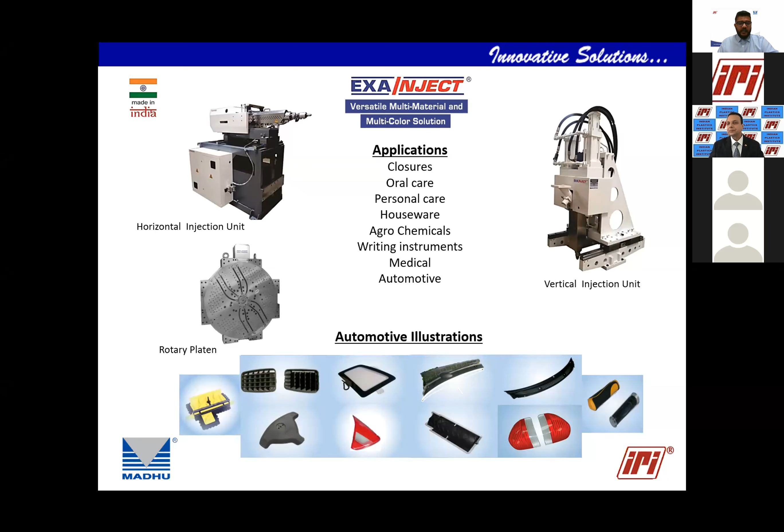Applications catered to include closures, oral care, personal care products, houseware items, caps for agrochemicals, writing instruments, medical parts, and automotive components. Most of the projects are confidential, so the pictures seen in this slide are only examples of parts from the automotive industry.

Most of the installations are on new machines, with compatibility achieved on Fanuc, Engel, Milacron, L&T machines, and even very old Chen Hsong machines. The conversion of the 1K machine to 2K machine is made possible. This now adds tremendous value and a very short ROI for the customer.

It is truly said that the quality of an injection molded part is influenced by melt homogeneity. However, the machine screw has to perform two contradictory functions: first, it has to plasticize, that is mix, and also to inject, that is pump the polymer. As we know, a good pump is not an efficient mixer and vice versa. Hence, it's of critical importance that the melt homogeneity is maintained.

ExaMix static mixers help achieve this with ease and are a standard recommendation from our end for automotive components, especially those which form part of assemblies requiring tight mold tolerances.

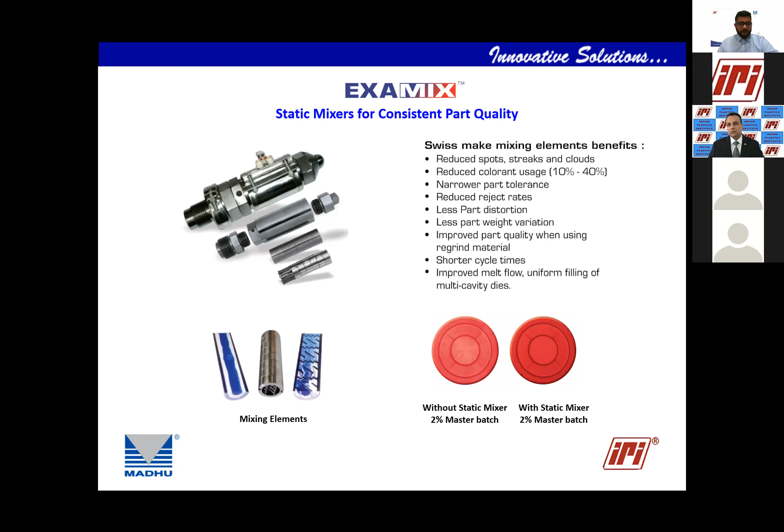I would like to end my presentation here and look forward to covering specific technologies for automotive plastic injection molds in my next presentation. I once again thank IPI for this opportunity.

Thank you, Mr. Abhinav. Thank you for respecting the time allotted. It's now my pleasure to introduce one of the stalwarts of the automotive industry, Shri Shalabh Sangalji.

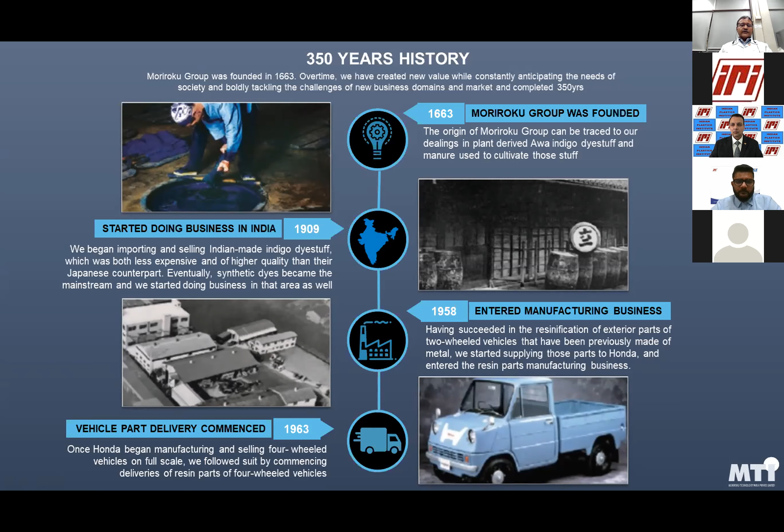In 1980, they set up their first manufacturing plant in the United States. So they expanded globally, with a trading office in Hong Kong.

As far as India is concerned, they entered the Indian market in 1996 along with Honda, because Honda also entered India at the same time, and the manufacturing plant was established at Noida, very near to the Honda facility in UP, Uttar Pradesh.

With the expansion of manufacturing facilities with Honda, Honda also established a new plant in Rajasthan, Bhiwadi area. So MTI also established a new plant in the Kaharani industrial area in Bhiwadi region in 2015. This is about the brief manufacturing activities being done by MTI - injection molding, assembly, vibration welding, and paint process, both interior and exterior.

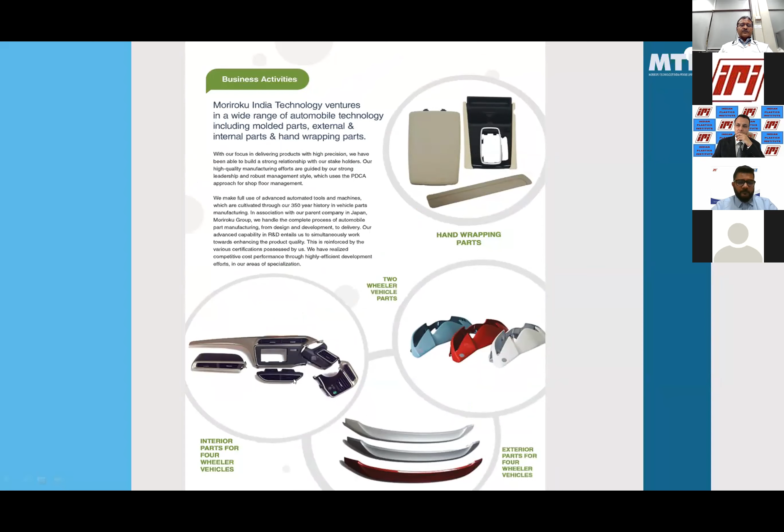The business activities are mainly focused on hand wrapping. We have internal hand wrapping activities, manufacturing activities, then two-wheeler parts with exterior paint, interior parts for four-wheelers, and exterior parts for four-wheelers as well.

This is the brief outline of the parts MTI is producing, and this is our global outline. For exterior and interior parts, you can see all kinds of parts being manufactured related to the instrument panel, air outlets and exterior. We have the front grille, cowl top, and spoiler, etc.

The total manufacturing system involves R&D activity. The main R&D activity is done either in Japan or in Asia, mainly Thailand. The development of production technologies, meaning development of mold and other customer-related development activities, is all done in India with the support of Japan. The final product manufacturing is done in India only.

So when we talk about development here, I would like to explain that 95% of the tooling, injection molding tooling—because today's subject is related to injection molding toolings—is being developed in India. Only 5% of Honda car injection molding tooling is developed outside India. That's a great achievement, and I think all the OEMs are now following this. It is a great advantage as of today to the Indian industry.

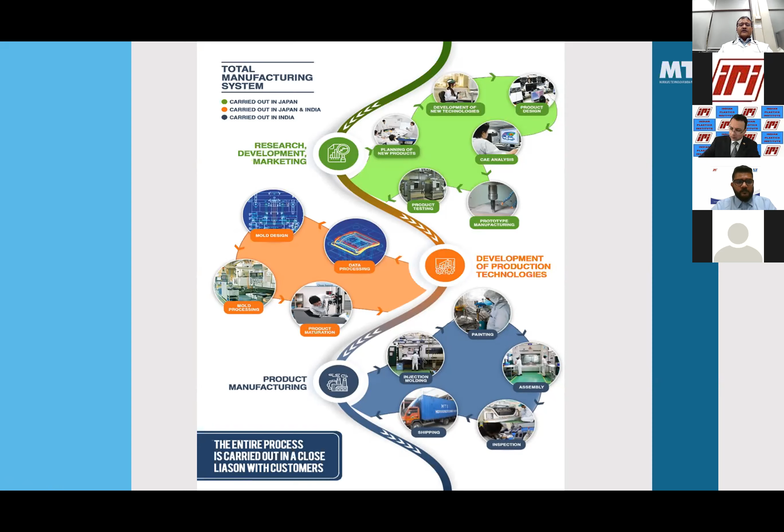As I explained, we have two plants, Noida and Bhiwadi, and the main customer is Honda, but currently MTI is open for other customers as well.

Now I come back to the webinar topic, and specifically today my focus is on automotive plastic injection mold quality and customer expectations. I will try to express my views on quality and customer expectations related to injection mold.

Before we proceed further, since we are talking about quality and customer expectation, it is necessary for us to understand the evolvement in the perception of quality in the last few decades. I will just show the timelines.

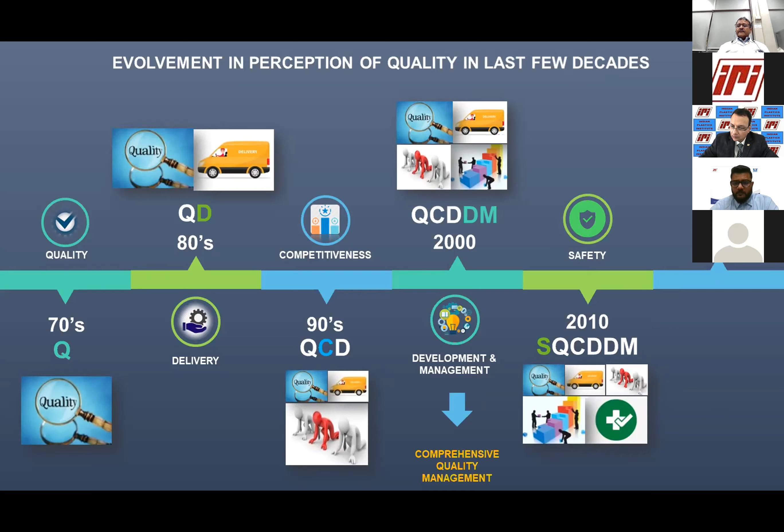Now, what happened in 2015? I would like to mention here so that everybody should know.

Across the industry, a new social and environmental factor was being added, because in 2015, in a United Nations resolution at a meeting in New York, a global target for 2030 was being framed in the form of SDGs, Sustainable Development Goals. Seventeen goals were decided across the globe, where every country and every government had to initiate those goals.

So finally, after 2015, in my own perception, the quality means SQCDDM-SE completely as a holistic quality management. The comprehensive quality management has completely turned over to the holistic quality management, and what has been added is a human spirit in the form of safety, social and environmental factors. So you can see how the situation has changed in the last 50 years, and how the meaning of quality and way of our working has taken a big transformation. Now I will keep this as the center of my presentation, SQCDDM-SE.

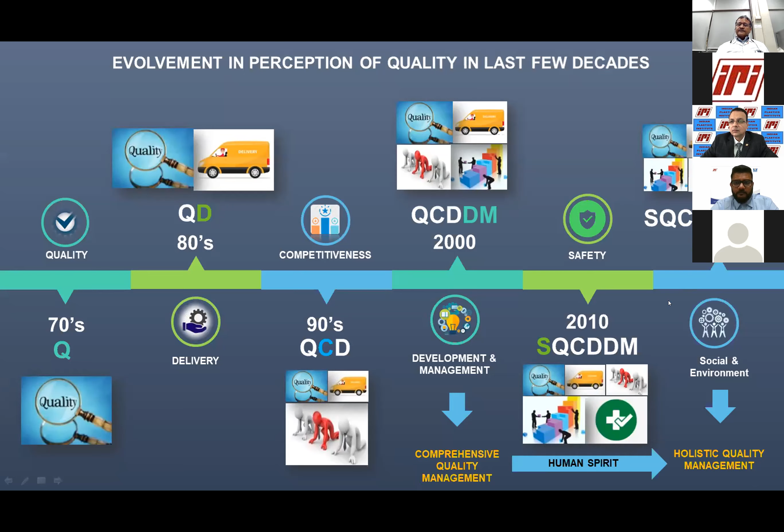Now, since our topic today is related to automotive tooling injection mold, where everybody always wants to seek the highest level of performance and effectiveness, when we talk about automotive tooling or any other product, there are many stakeholders involved in making that process actual. The first kind of stakeholder is the tool and other accessory manufacturers, maybe the steel manufacturers, accessory manufacturers, and finally who is creating the tool.

So I try to establish some targets from such kind of stakeholders. I'm not able to completely list them out, however, like customer involvement, understanding expectations of the customer, QCDD, meeting customer expectations, providing new and upgraded technological solutions, reasonable profit, and a repeat customer. So these are a few of the targets of these stakeholders.

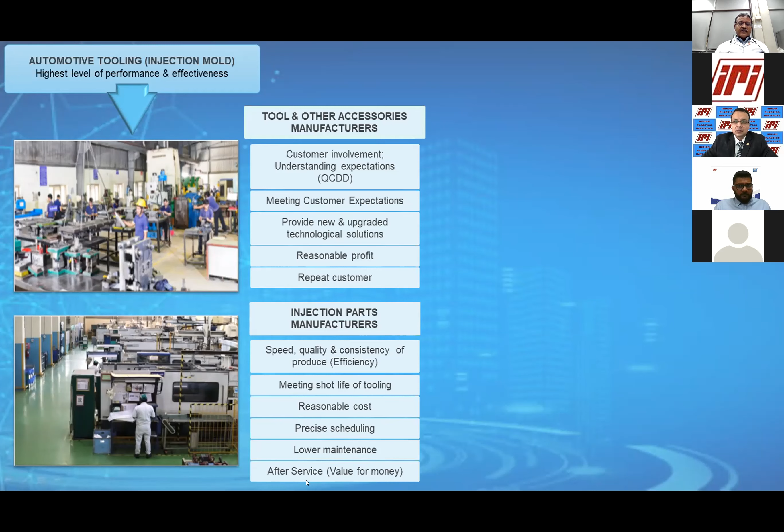The next stakeholders are injection part manufacturers, where MTI stands here. So if we see the injection parts manufacturers, what we need: speed, quality, consistency of produce, meaning efficiency, meeting the shot life of tooling—meaning if the life is 5 lakh pieces, it should complete 5 lakh without any problem—reasonable cost, precise scheduling, on-time development, lower maintenance, and of course after-service, meaning completely value for money.

However, now the OEMs come into the picture, and OEM is asking, okay, are we able to meet SQCDDM-SE for all stakeholders? The OEM understands that if everybody is meeting this concept, it's a win-win-win situation for everybody. And nevertheless, OEM is directly related to the end user, and end users are the people of this world. Since we are living in a society, it is OEM's first and foremost responsibility, as a front runner, to care about the society and to take care of the human spirit. So it is mandatory for them to understand all the running concepts, latest concepts, and make them implemented for all the stakeholders where they are connected.

Now I try to list out a few concepts here. These are the 6 management milestones for the confirmation of SQCDDM-SE in every industry: PDCA—are we doing enough PDCA? Bottom constitution, continual improvements, digitalization, enhanced technological upgradation, and of course confirming safety, social and environmental aspects. So these are the 6 management milestones which I try to derive from my experience, which will confirm that each and every industry is following the concept of SQCDDM-SE, which is a win-win-win situation.

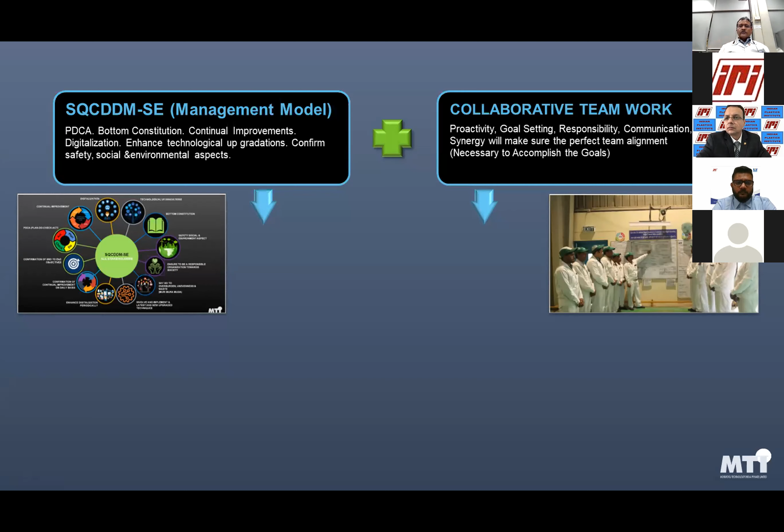Once these two combine, it creates a futuristic approach - meaning learn from the past, work today, while continuing to remain lean towards the future. This is how the model is required at the end of the day, every minute: the futuristic approach. And finally, this creates an unshakable foundation for all stakeholders.

So we can see here how the OEM starts checking about SQC, DDM, SE, and collaborative teamwork. This is how a win-win-win situation comes up day by day by following this kind of approach.

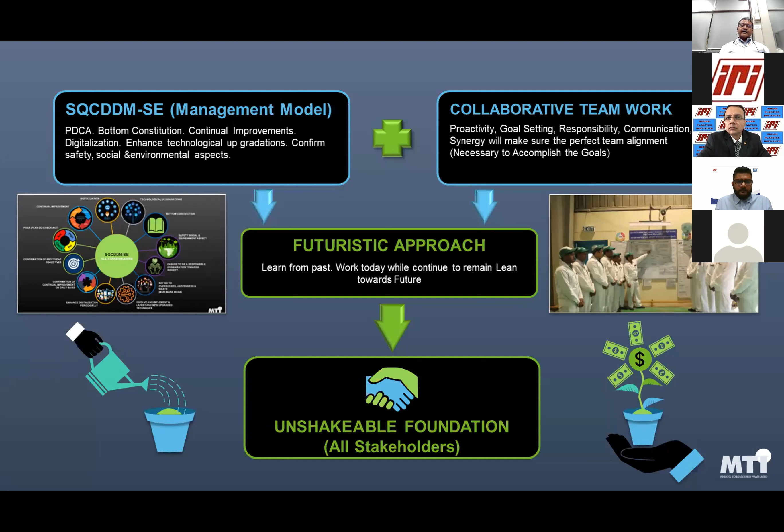Hence, keeping collaborative teamwork in the center, injection toolings achieve the highest level of performance and effectiveness - 100% meeting the futuristic approach. Inducting past learning means creating potential improvement for the future, with combined efforts from all stakeholders involving their own teams. Then we can achieve customer satisfaction in the form of SQC, DDM, SE, because that ensures every automotive tooling is superior in this approach compared to the previous one - this is continual improvement.

Bottom constitution and any other new aspect which is emerging in today's society, considering the change in the environment.

For example, considering a futuristic approach, we have done many activities at MTI - in Japanese it is called kakotora, meaning learning from the past. I would share some examples, like a cross-functional team following the PDCA approach. So let me explain some exemplary examples here.

This is related to cooling efficiency, which is bottom constitution - it was completely teamwork. The MTI team tried to understand the hot spots through thermoscanning of the mold in running condition, and found a lot of problems where cycle times increased. We applied this learning to all new toolings with our tool manufacturing companies, and started getting the benefit - you can see how the speed of production increased, with a substantial 8 to 10% increase in cycle time because of these activities.

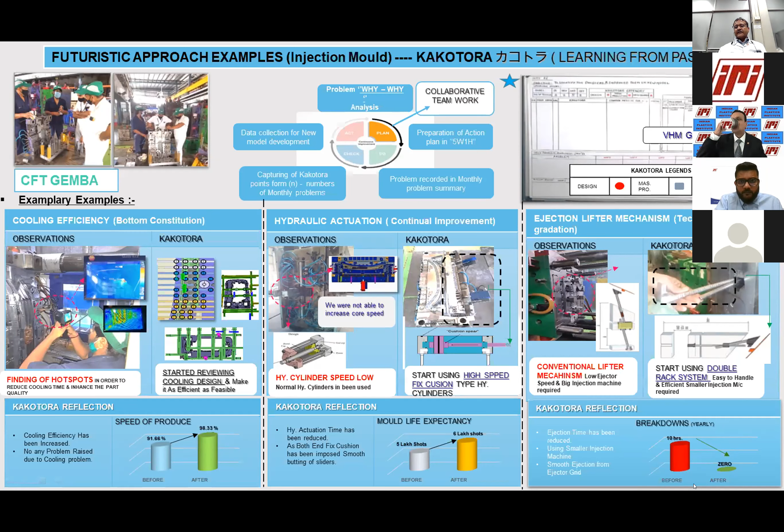The third was the ejector lifter mechanism. We are very thankful to my friend Sri Prakashan and the Mastercraft team - they introduced this about 6 years ago in one project. At that time we were scared of using such a double rack system, however it was such a wonderful system that now almost 100% of MTI molds use the same double rack system, and you can see the benefit: breakdown because of lifter rod breaking or mismatching, and subsequent damage in the cavity, has become completely zero.

So finally, quality and customer expectations mean a holistic approach. This holistic approach and teamwork lead to customer satisfaction, which is finally a win-win-win situation.

So the crux of the presentation here is that we must have a perfect balance in the EQ and IQ. Usually we utilize IQ, but we are missing as the industry about the emotional quotient, because this quotient is the main teamwork. And this is one of my favorite ones: involve your heart and brain for accomplishment of the goals.

So I would like to quote here one of the very famous quotes by Mahatma Gandhi, as actually mentioned by Stephen Covey in his book, attributed to Mahatma Gandhi, that it is very easy to use hand and back of a person, but how to convert hand to heart and back to brain for the accomplishment of the goals. This is where the true management functions lie.

So if we are able to utilize the heart and brain of each and every individual working in our organization, I think there is no looking back, and we will definitely be able to meet the competitiveness in today's environment. And then it will be easier to have an unshakable foundation in that condition.

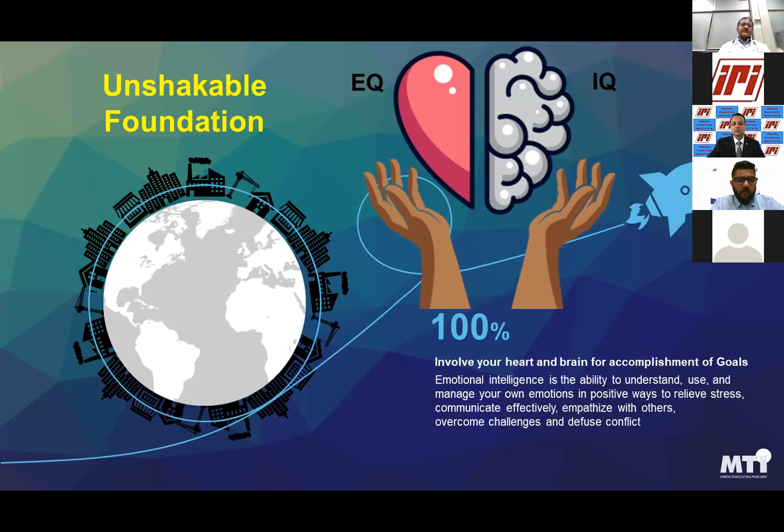So this is how I see that Indian industry should approach with such long-term thinking and with certain principles and fundamentals to achieve an unshakable foundation. So we can also say, okay, we are a 50 year old company.

Now, many people ask me every time, okay, you explain many theories, but how to achieve these kinds of theories? Yes, it's a very difficult task, of course, because 5 years ago I was also in the same situation. But then we tried to start it. I thought, okay, I know many things, but how to use these things at the actual shop floor platform? So I always say it's like optimism is a way forward to have a holistic approach.

And it's a very beautiful line here: let's utilize only the privileges available with humans - our own conscience, wisdom, and self-imagination - to find out our own new normal, considering a variety of circumstances. Now you see, this new normal word, already last year we heard many new normals after COVID came. And today also we understand how things have changed. Even now, before with the panelists and other members, we were discussing how the new normal is taking shape.

So this is how we can see there is no other solution with us. There is no other express solution with anybody. We have to understand the circumstances, and we have to use our own conscience, wisdom, and self-imagination to correct and counter those kinds of circumstances every day.

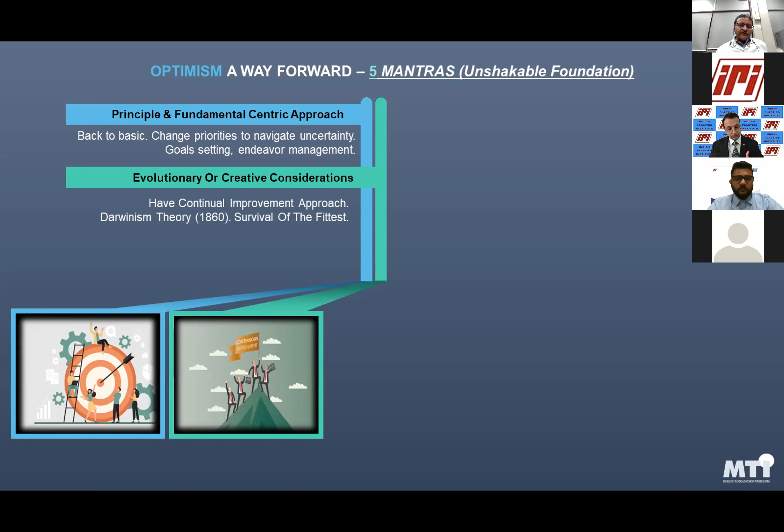COVID-19 situation is something which now it is being understood that yes, there is a supreme power who is running the world. So you never know. So how to remain fit? Then only that will decide our own survival in each and every scenario. The third one is enhanced participation, meaning be proactive. Repeat the concept of learn, do, and act.

Synergetic persona. Respect to the individual. When I visited Honda, at reception I learned Soichiro Honda, who established Honda itself, had as his first mantra respect for the individual - no politics, teamwork, getting away from protective, defensive, and manipulative communication. This is the need of our times. We must give away our ego and pride. Only then can we have a synergetic persona, which creates teamwork, and then we can achieve the interdependent stage.

Value creation techniques - task with scenario planning. Nowadays, in the context of COVID-19, all the long-term plans many industries had made have vanished. It's completely scenario planning now. Today, what is my plan? How do I accomplish it? Finish it today itself. The speed of work is more important because you never know what will happen tomorrow. There's a lot of uncertainty in the future. So scenario planning, crisis management, and dramatic transformation of the business model is key as of now.

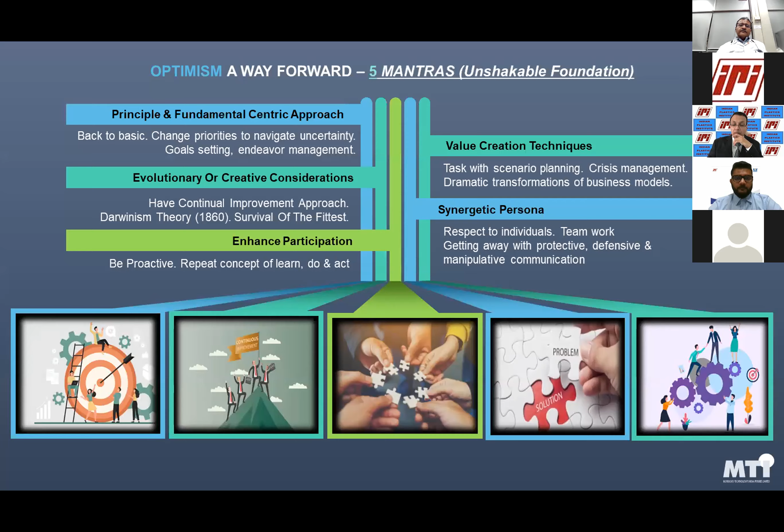I would like to end my views on this webinar with one of my most respected and famous quotes, from Emerson: that which we persist in doing becomes easier, not that the nature of the task has changed, but our ability to do it has increased. This is what I have interpreted here: continual enhancement of our ability through futuristic consideration is the key for an unshakable foundation, applicable for every individual and every organization.

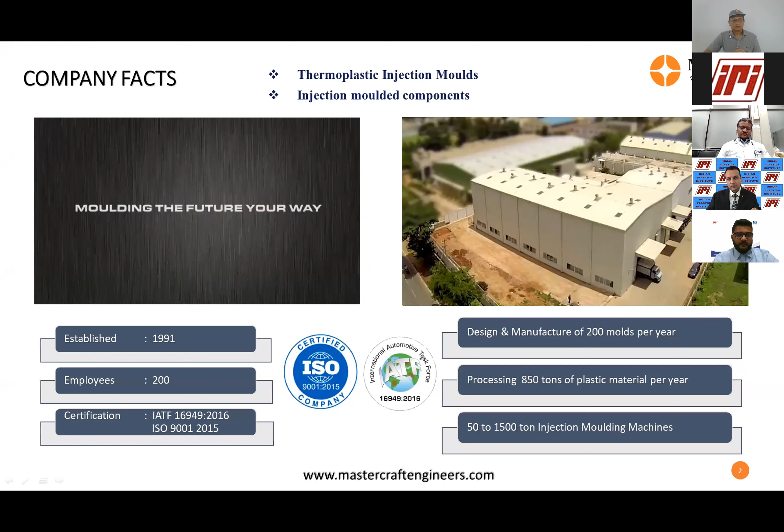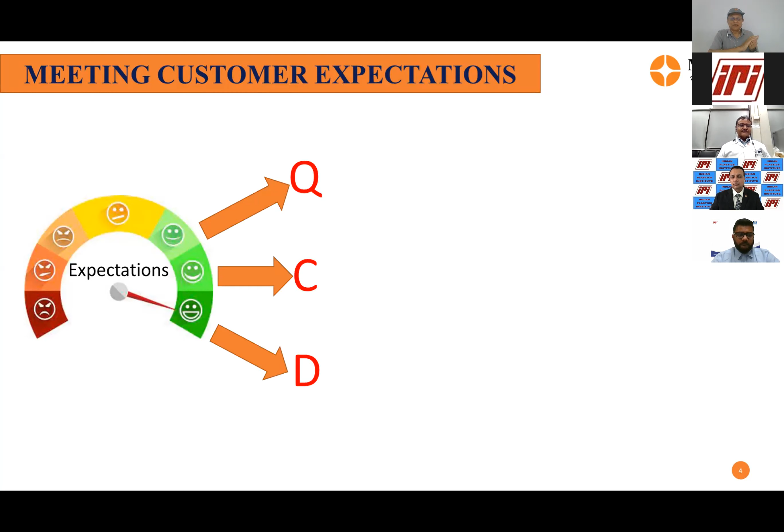Okay, now coming to the main topic, which is meeting customer expectations. Salabsan has already given us an exhaustive requirement. Of course, he has mentioned many more than what I'm mentioning here. QCD, from my perspective, still QCD, but I probably still have to go a long way to meet the other alphabets of this quality requirement. I will touch upon only this QCD now.

The first one being quality. This is very critical, and this is mandatory, and there are no negotiations from our customer as far as the quality of molds, what they expect. So this is 100% has to be met in any case.

The second thing is the delivery requirement. The delivery, in the sense, it's not the final delivery of the mold. It starts from the first sample, many stages of sampling, and then many production runs for meeting the event dates, and then finally the dispatch date. So delivery has to be met at all stages, not only one stage.

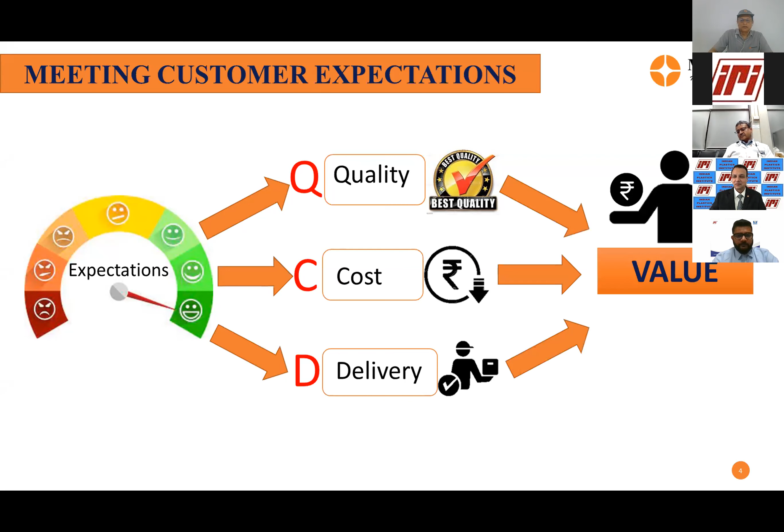The last one is the cost. Of course, customer expects the cost to be as low as possible. But I think these days the cost is perceived in a different manner. So I would say that together, quality, cost, and delivery comes the value for the molds what our customer is looking for.

So now, where does this value come from for the molds? I have taken the top 5 expectations based on my experience of what the customer expectations are. There are a few more in addition to that, but these are the top 5.

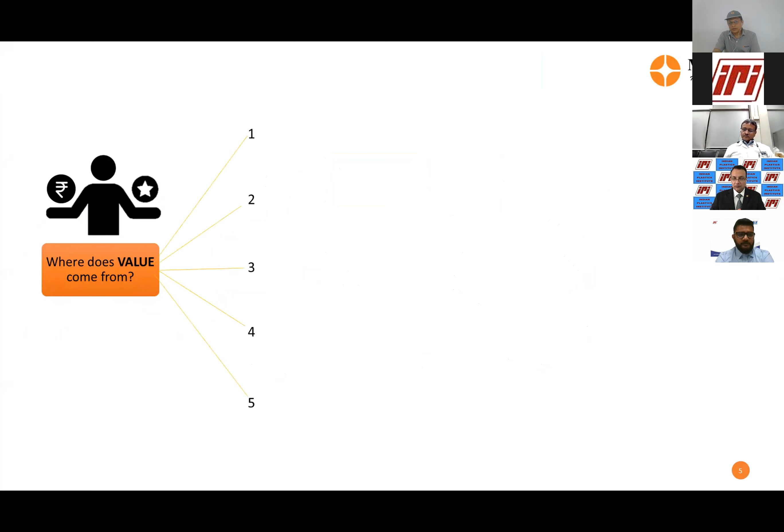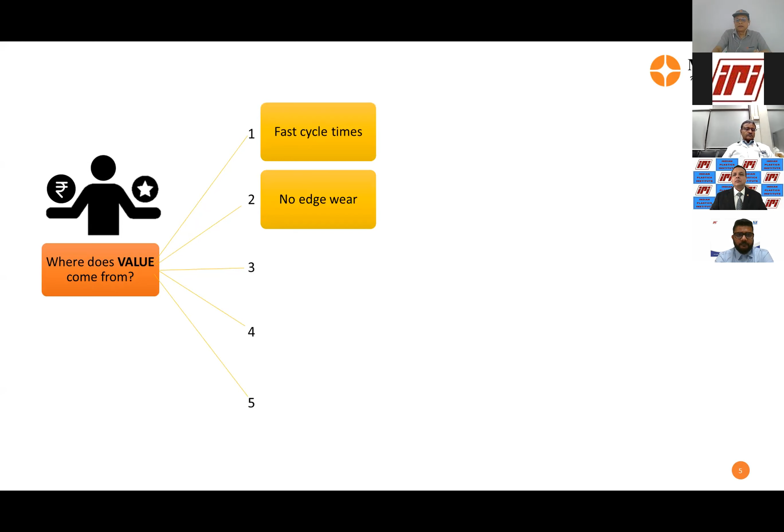The second requirement is no edge wear is expected to take place at the parting line for the entire lifetime of the mold. It's not just for a short term in the beginning, but for the entire lifetime - customers do not want any edge wear on the parting line. The third one is to avoid any post-molding manual operation that doesn't add value to the entire process. The fourth is obviously no breakdowns, because most of these molds are running on JIT or very minimal finished goods inventories.

The last one is very critical - the molds have to be very easily maintained, whether it's breakdown or preventive maintenance. The mold has to be repaired very fast and get into production mode as early as possible. So these are the 5 major parameters our customers look for, which will derive value for whatever price they pay for the molds.

If the mold meets all these 5 requirements, there should be no reason why the customer will not be satisfied. Now, how do we get these 5 parameters into the mold?

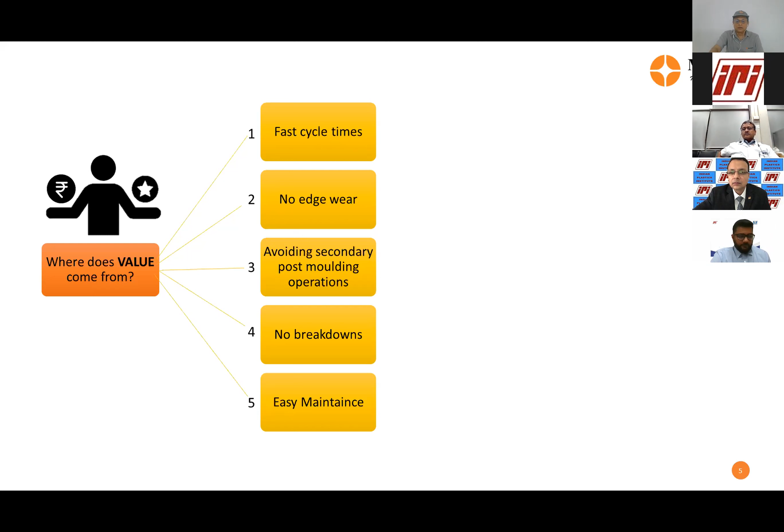The only option, from our side, we feel is that the molds have to be very, very precise. Sometimes the parts may not be so precise, but the mold has to be precise if it has to meet these parameters.

For example, the exterior and interior parts typically have a flush and gap tolerance of maybe 0.3 to 0.5. And probably if the part is within plus minus 0.1, it will meet the specifications of gap and flush without any issue. But this doesn't mean the mold can be made at that same tolerance.

The mold has to be made very precise if it has to meet the 5 basic parameters the customer is looking for. Now, how do we build this precision inside the mold? In our view, the precision has to be built right through the entire mold manufacturing system itself.

It starts from getting input from the customer, doing the DFM analysis, getting the design done, and process planning, machining, deciding on the BOP and standard parts. Assembly, of course, is very critical. Inspection, testing and debug. Through all these stages, the quality has to be built in - there's no one stage that we can do away with that decides the quality.

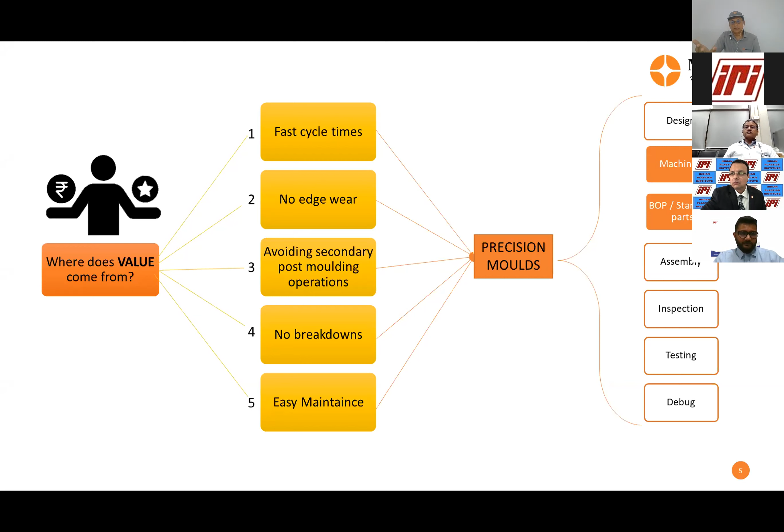So a precision mold, as I said, has many parameters, but I will touch upon machining first. In machining too, there are many areas where quality has to be built in, but I'll focus on two systems - two parameters, I should say - which greatly influence the quality of the inserts of the mold.

The 0-point system is something we've been using quite widely for many years, and we have gotten a tremendous amount of success in achieving very good quality molds and inserts. So I would like to share some of our learnings so it will probably be useful for the audience.

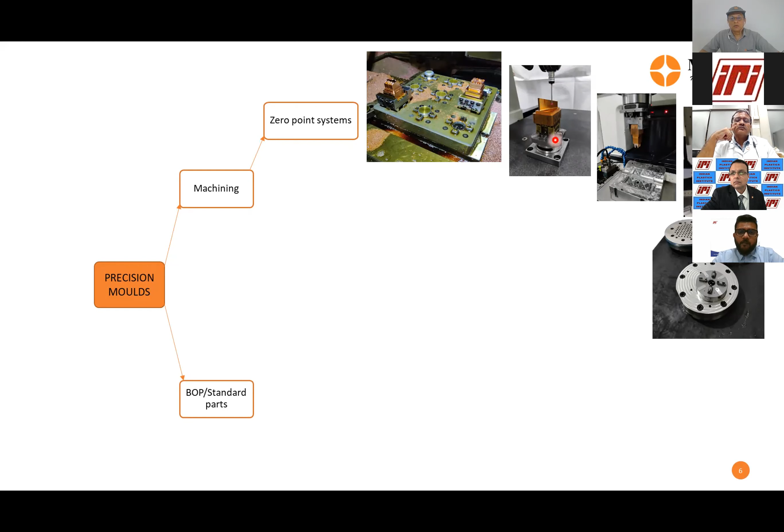After the machining is done, the entire setup - along with the holder - goes onto the CMM machine where the electrode is inspected. The advantage of this system is that from the CNC milling to the CMM, the alignment in all 3 axes is within 2 microns. This is the best part of the entire system.

Once the electrode is inspected, it goes onto the chuck of the EDM, and again with the same system - the chuck is here - the 2 micron accuracy is carried forward. So even though there are multiple stages of machining, the 2 micron accuracy is carried forward from start to finish, with no addition of tolerances due to the multiple stages.

The same approach has been applied to the inserts as well. These are the pallet systems we are currently using - this is an empty pallet, and here you can see an insert mounted on the pallet, on the 5-axis milling machine. With this, we are able to machine this entire insert in a single setting, and then the insert along with the pallet goes onto the EDM machine.

So here again, the job between the two or many machining operations gets to the same accuracy of alignment, within plus minus 3 to 5 microns. So in the entire manufacturing system, we have the accuracies built into the process itself. It is not dependent on human manpower. No operator is giving this accuracy on the job or on the electrode.

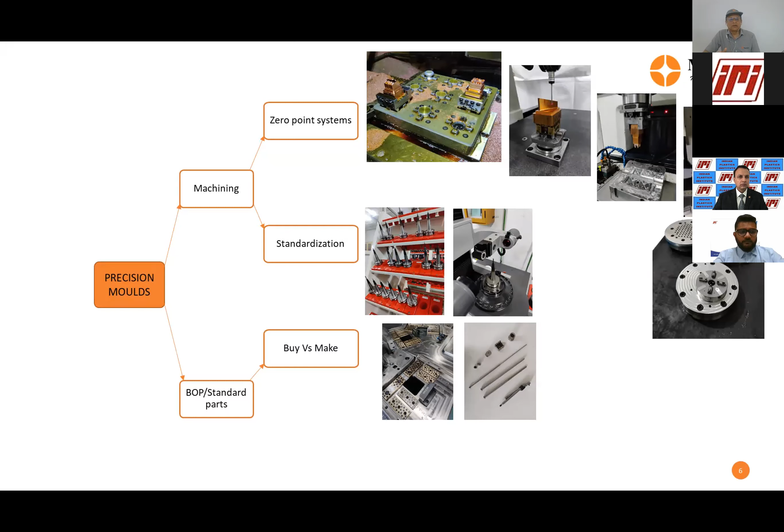After we moved on to standard parts, it's given very good comfort to our customers. Of course, it's a little bit more expensive, but the benefits we get, in terms of value we can give on the mold, are phenomenal. So we only make parts if they're not available in the market. Otherwise, we buy all the standard parts.

The last one is smart mechanisms. Today we have many smart mechanisms, at least a few. The one on the picture here was already spoken upon by Salabh sir, who also gave some listing. We've been using this for the past 4 or 5 years now. It was difficult for us to take the decision of introducing this to customers, because we were skeptical about the performance. But having gone through the advantages, we tried it in one of our machines and one of our molds, and found it was doing good results, and started recommending this to a few customers.

Similar smart mechanisms are available for early return mechanism, or three-plate mechanism, or even collapsible cores. So I would recommend using smart mechanisms instead of age-old technologies, especially in cases where productivity is becoming very high.

So to summarize, I just spoke about QCD, which is basically the value the customer is expecting from the mold. And to deliver value, the molds have to be precise. There's no two ways about it. Whether the product needs that kind of accuracy or not, if the mold has it, the production has to be done well, and the 5 parameters of the customer have to be met. There's no other option other than the mold has to be precise.

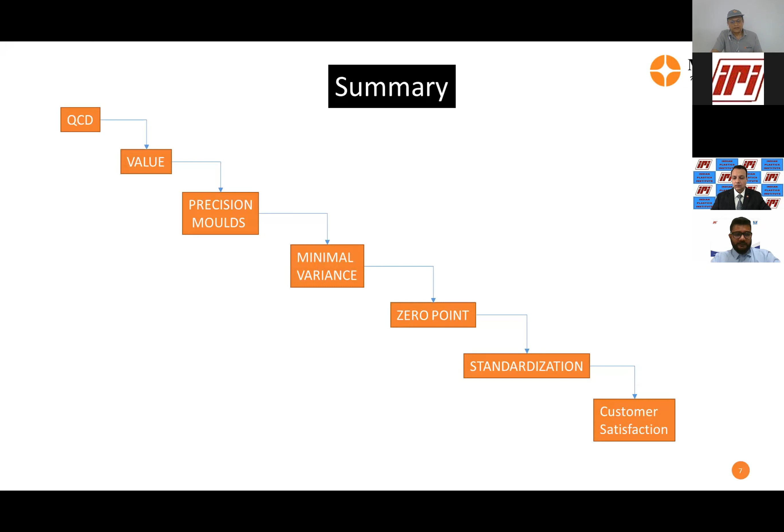Thank you. Thank you so much for your time and patience.

Thank you, Sri Prakash sir. Fantastic, thank you for sharing. This is most important, right? Sharing the extensive knowledge and the success, and the reasons for the success you've been achieving, and that too in a very crisp and lucid manner. Very well presented in terms of content.

QCD, we heard from Salabh Sangalji and now from you, and the meaning of value - what is value - it's only precision, precision and precision all the way. Amazing to hear accuracies of a few microns. So thank you so much for sharing your valuable experiences and insights. We wish we had more time, but I'm sure we can carry this forward as probably a second part in upcoming webinars. Thank you so much, sir, once again.

I would now like to go to the final session, the third session. Having introduced Mr. Abhinav Shah already in the earlier endowment presentation, I would request him to straight away dive into his presentation, about contemporary tooling solutions being implemented in automotive injection molds globally and in India. Abhinavji, please cover your presentation in the next 25 minutes max. Thank you so much.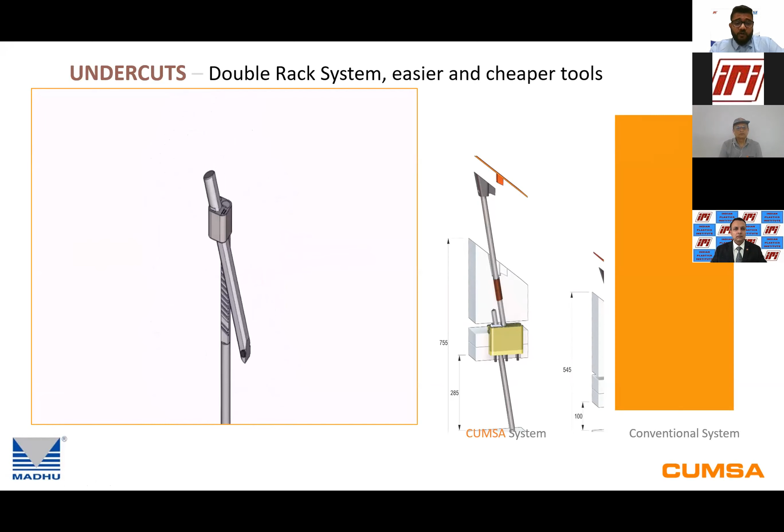CUMSA double rack system allows demolding of undercuts up to 60 mm, having draft angles from -55 to +35 degrees, with maximum ejection stroke of 125 mm. This in turn reduces the overall tool size. Also, its vertical function maximizes the tool strength as it eliminates the need of high precision angled housing in the core plates, and machining in the ejector plate is drastically reduced.

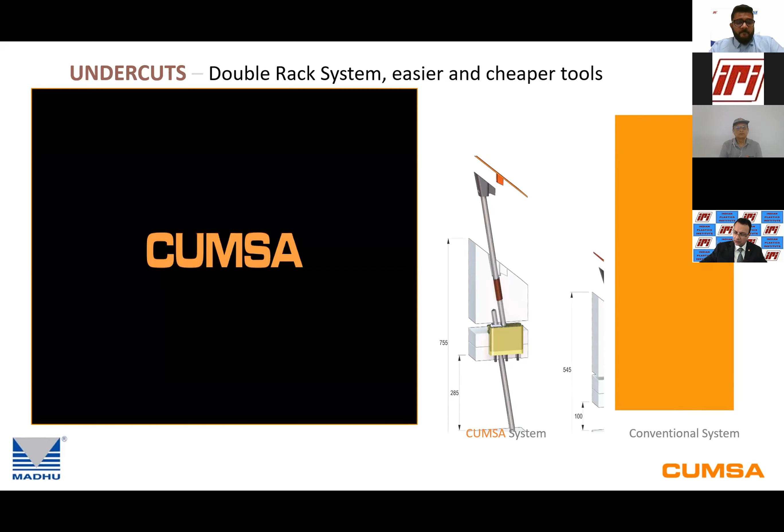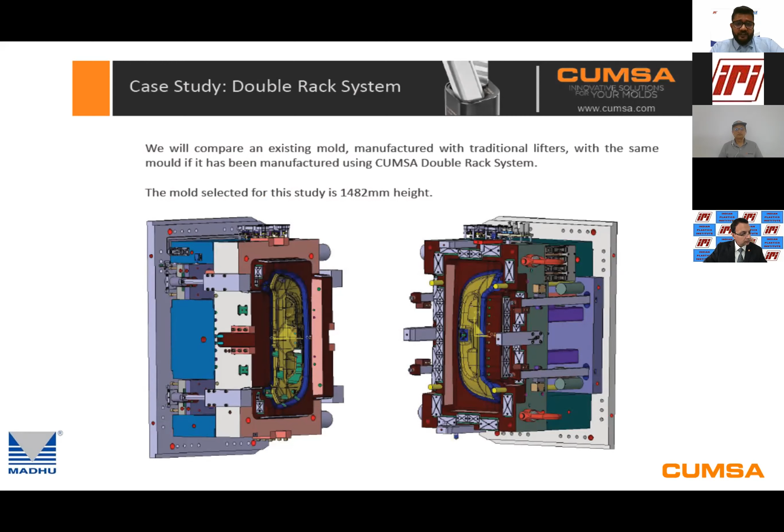Let's talk about some actual examples and cases. Firstly, let's see how the mold size reduction is possible using CUMSA double rack system with actual facts and illustrations. We shall start with comparing an existing mold, which has a mold height of 1482 mm, manufactured with traditional lifters.

Now, the increase in mold height, due to the longer ejection stroke and angular movement to release the undercut, demanded that the mold had to be mounted on a higher tonnage machine than it was actually planned for. Now let us see how CUMSA double rack system can make a smaller but stronger and more reliable performing tool.

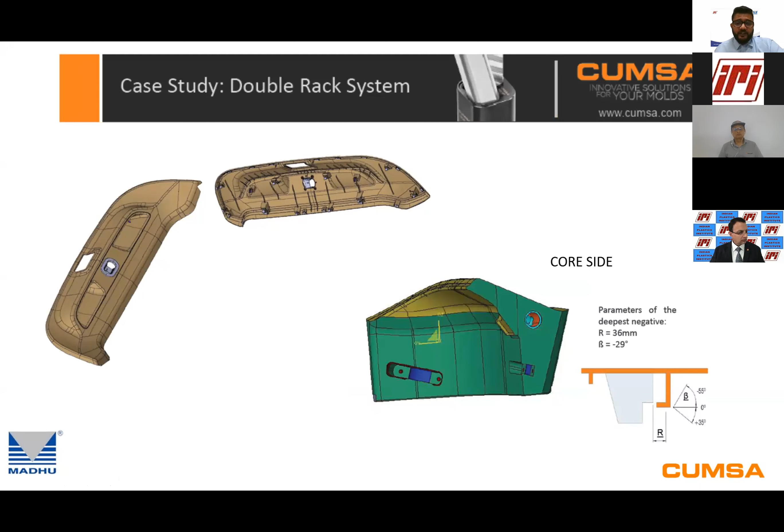As we can see, the part has undercuts on both sides, on the cavity and the core, which need to be released via a lifter. Let us first talk about the undercut on the core side, which has a depth of 36 mm with a draft angle of -29 degrees.

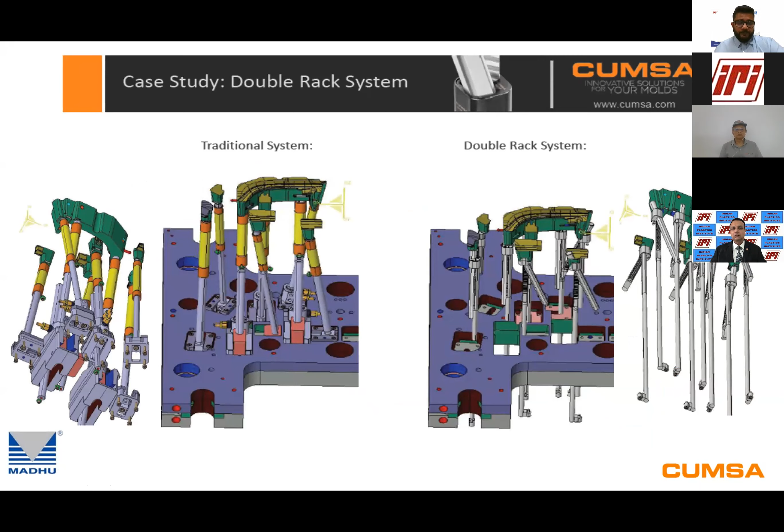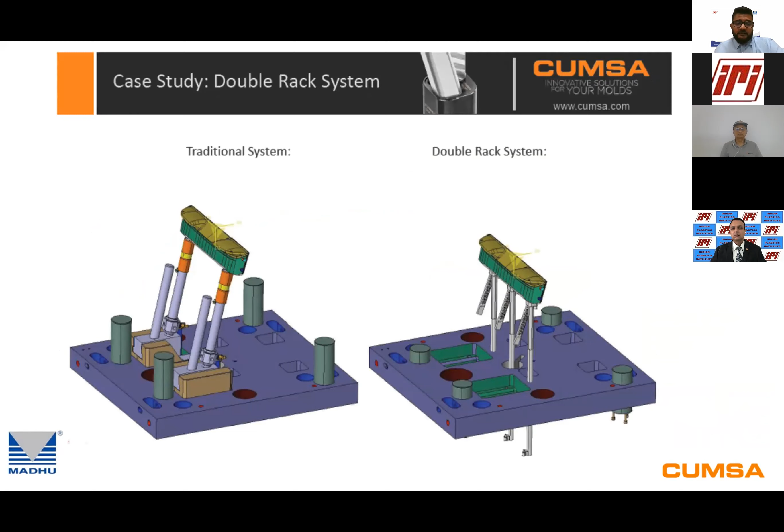Now let us start the comparison of demolding of the undercut from the cavity side. Here the depth of undercut is approximately 32 mm with a draft angle of -25 degrees. Again, the image on the right using CUMSA double rack system shows the ease of machining compared to the complicated left-hand side conventional system. Let's talk about the other facts.

As Salabh sir and Sri Prakash sir mentioned, the end customer's requirement is reduction of cycle time, ease of maintenance, no breakdowns, no secondary post-molding operation, and importantly, the delivery time. So let's see how we can help with this.

Taking this case, compared to the CUMSA double rack system, the conventional system is difficult and consumes more time for alignment and finishing. Conventional lifters require accurate angular machining to guide the lifters in the plate, and long angle shafts have to be perfectly aligned between the core plate and the ejector plate. Whereas in CUMSA, the angle holes are free pockets, needing no accurate 5-axis machining.

In conventional systems, due to multiple parts and angular machining, it is difficult to provide symmetrical cooling around the part. Most importantly, the undercuts tend to have a thicker section than the overall part thickness, whereas in the CUMSA lifter, the proximity of the cooling channel is better and closer to the part. We all know the importance of cooling proximity around the mold.

Like Salabh said initially during his presentation, they were able to reduce the cycle time by identifying the hotspots in the mold. Now, if we have even cooling around the mold, we are solving the issue right at the design stage.

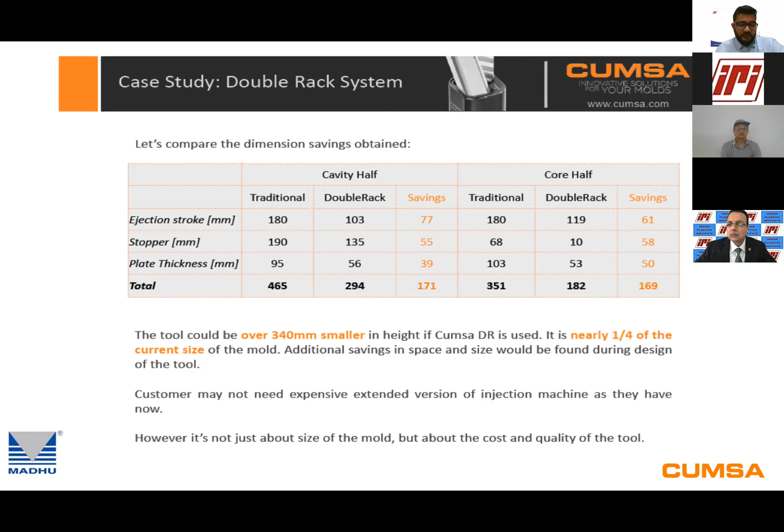Let's see a case study of the same part being developed with a conventional system and a CUMSA system. Here again, the CUMSA system achieved a total saving of 340 mm of mold height. Here is a picture of an actual tool built with the CUMSA system of the part we saw above.

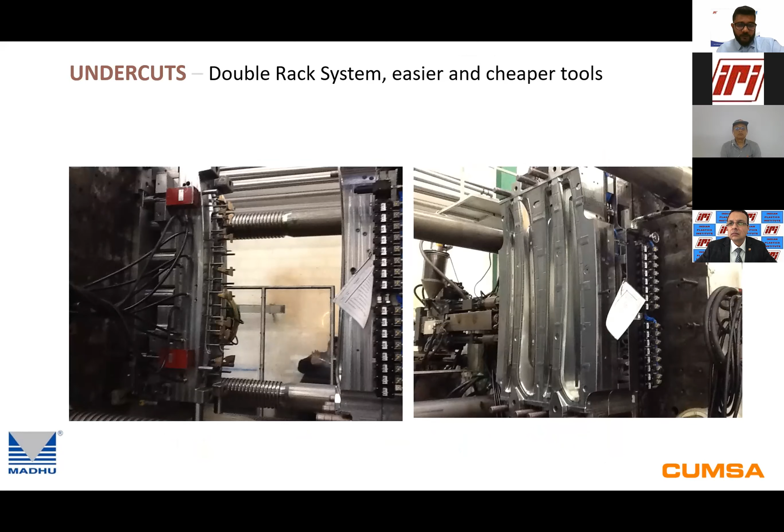Let's dive into another case study done at Simoldes Group comparing the conventional lifter and the CUMSA double rack system. On the left, a typical conventional lifter assembly uses much more space compared to the CUMSA double rack system on the right, which allows even spacing of ejector pins and cooling channels. The conventional lifter design requires a lot of machining, which compromises the strength of the ejector plate.

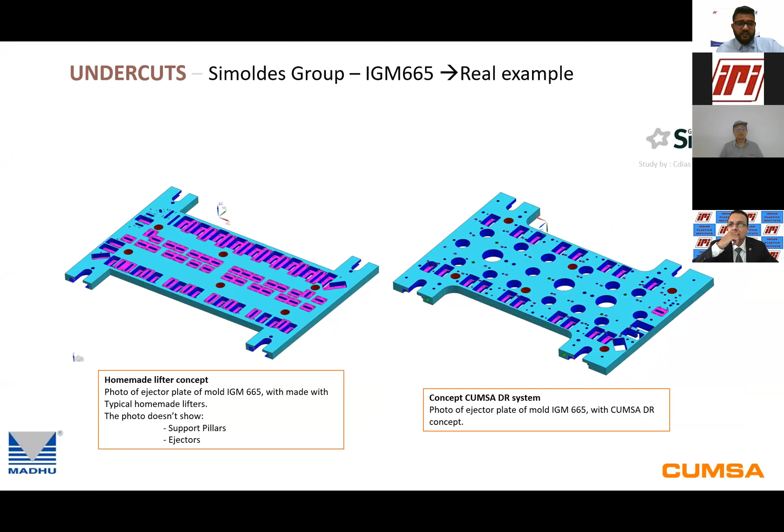To summarize, by using this CUMSA double rack system, Simoldes Group saved approximately 60,000 euros by saving on steel, machining cost, and most importantly, the assembly time.

This is another actual example of a door trim installed with a CUMSA double rack system. This ends the CUMSA double rack system solution.

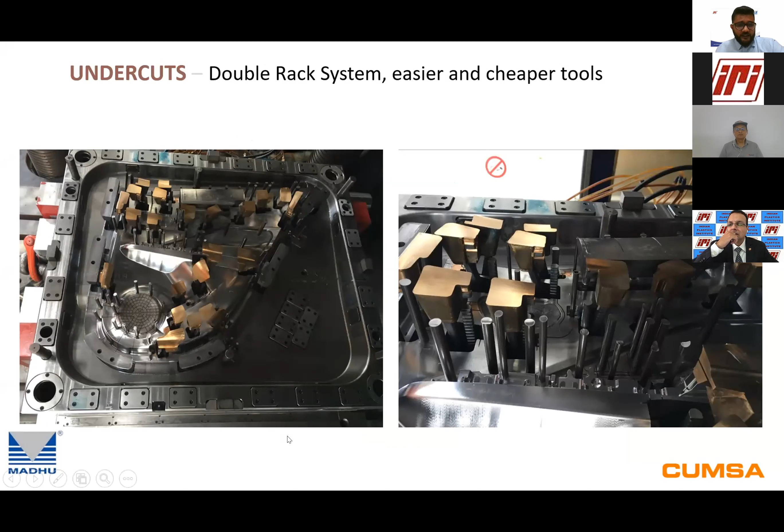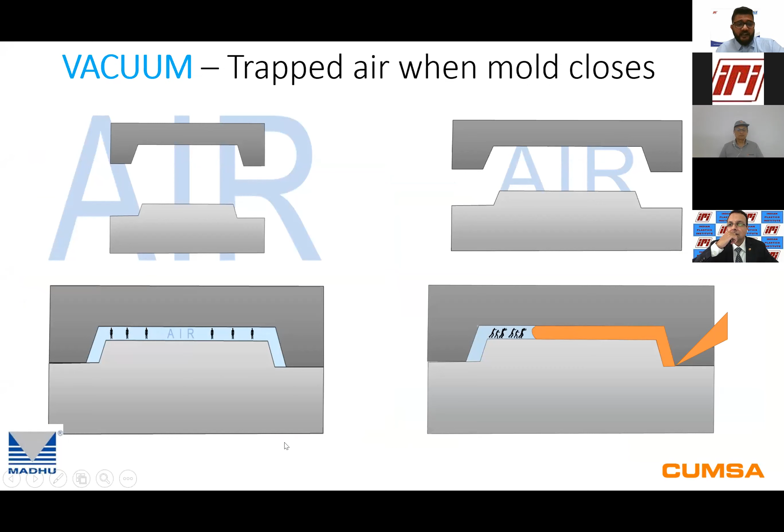Now we dive into another interesting topic, the air entrapment in the mold. This is one of the biggest fears and challenges faced by mold manufacturers and processors.

Let us see what happens through an animation. When the mold closes, air is trapped inside the cavity. If injection starts, the air will be cornered, heated, and compressed by the plastic, producing a poor quality plastic part.

To optimize the injection process, we must take out the air from the cavity. There are several methods to accomplish this, but in all of them, it is actually the injected part that pushes out the air. To solve this, we have to create a vacuum.

In this video, we can see the installation of the vacuum jet sensor, vacuum jet pump, and air poppet valves. All of these are linked and air can be vacuumed through the air valve or the clearance of the ejector pins, and possibly through the venting lines.

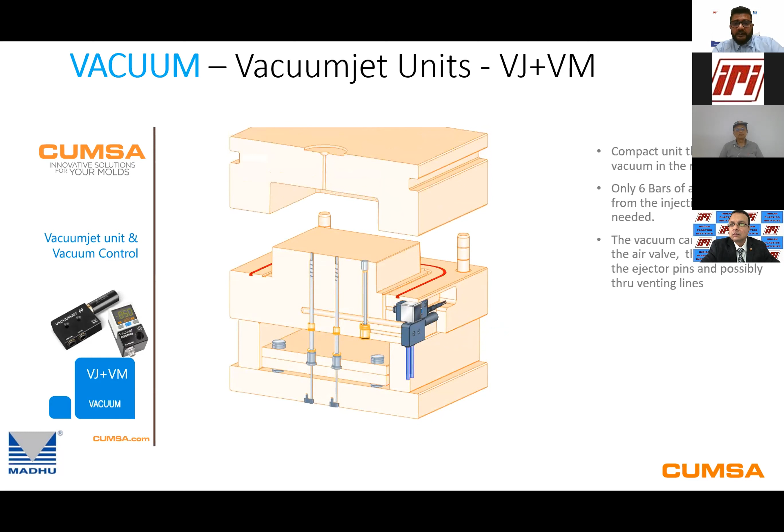As we can see in the video, you need to seal the ejector pins and the parting line. If this is not possible, we can link the venting channels to the problematic area and suck the air out.

With vacuum jet, when activated prior to injection, a valve opens and air is vacuumed, leaving the cavity in optimal conditions for injection.

Also, during the injection process, air can be vacuumed through the venting lines. So we are doing two things: taking the air out from the cavity before injection, and also taking the air out continuously through venting during the injection process.

Let's now dive into some case studies. Here is a part made of ABS with 65% long glass fibers. The problem was flow marks or glass marks on the component.

By using the vacuum jet system, a lower injection pressure was achieved, brought down from 800 bar to 500 bar. It also helped reduce the cycle time by 4 seconds, and most importantly, the problems with visual appearance were solved. Hence, the scrap was brought down to zero.

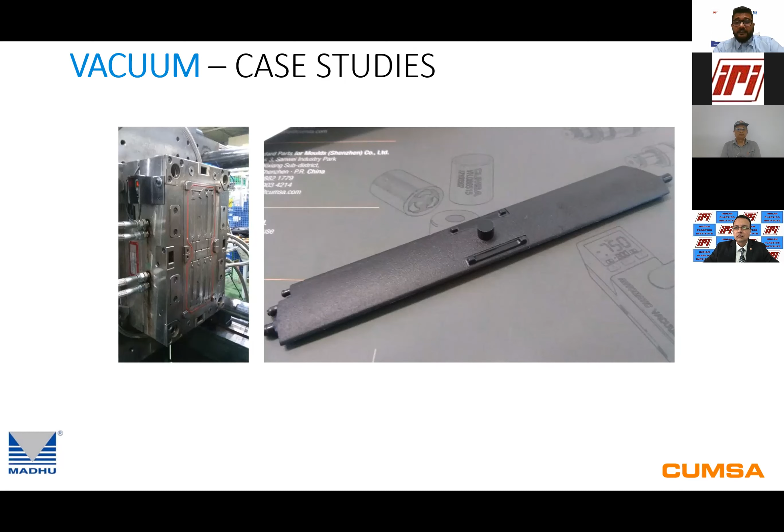Here is another example of a PC clear lens, where the challenge was again with visual appearance. With use of the CUMSA Vacuumjet, not only were weld lines and air bubbles prevented in the critical area, but the mechanical strength was also increased due to perfect plastic distribution.

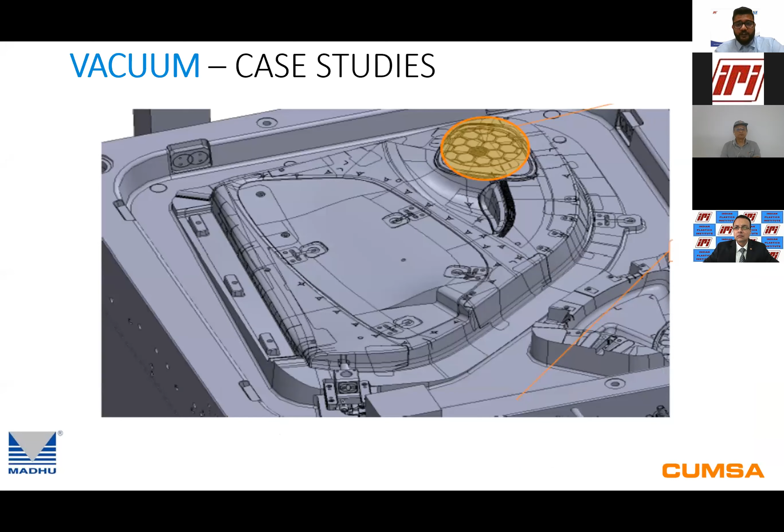This is an example of a door trim where the challenge was to fill the plastic material evenly through the cavity profile, mainly because of the highly ribbed speaker area. So we worked together with the mold maker to take the air out of the speaker zone and connected all the other air vents to the vacuum jet unit.

This resulted in the speaker grill filling with ease. Thus, there was a reduction in injection pressure, which avoided short fill and parting line flashes.

This ends the value addition done through the double rack system and vacuum jet. Now we go to another interesting product, the servo mold.

Now let us talk about servo mold solutions for threads, which is an innovative unscrewing system. Servo technologies offer countless possibilities for precise and accurate automation of rotational and linear movements, especially in injection mold making.

To realize its potential, Servo Mold and Madhu Group bundle the experience of more than 20 years of mold making and automation, using the results to synergize and create a clean and efficient standard for automation of injection molding tools.

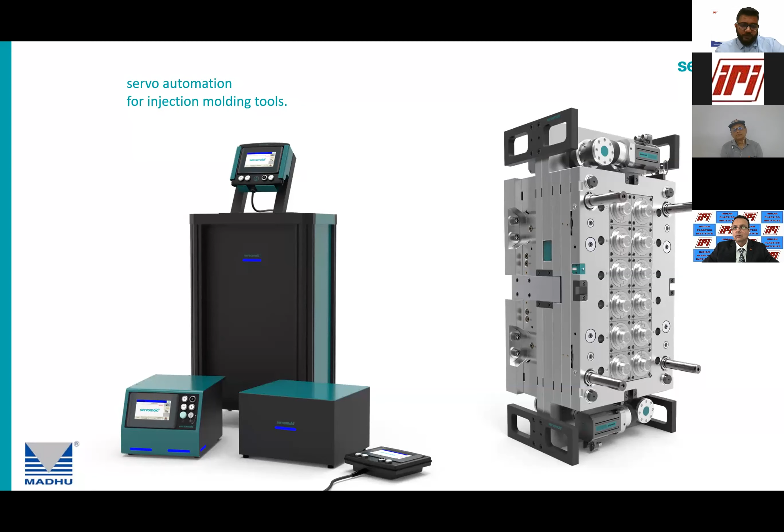Servo Mold offers a wide range of components, from single drive units to ready-to-use unscrewing devices and complete unscrewing halves, all specially adapted to the requirements of injection molding tools.

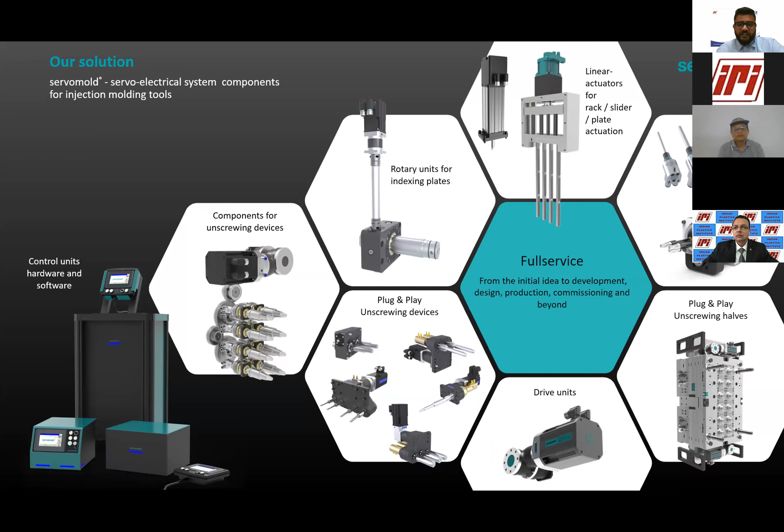Here we can see examples of many projects Servo Mold has realized in the automotive sector.

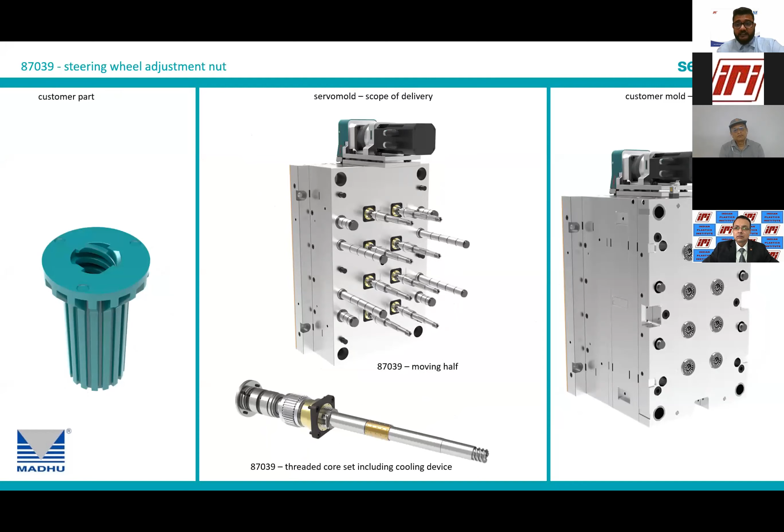Again, in this project, Servo Mold supplied a complete unscrewing half. This includes the plate as well as all the gear components, drive units, and thread core sets, completely assembled, tested, and shipped out.

Servo Mold has already made several spindle nut projects, used in many places in cars where motorized adjustment is required, including seat, steering wheel, mirror, and headrest adjustments. In this project, a complete unscrewing half was supplied again.

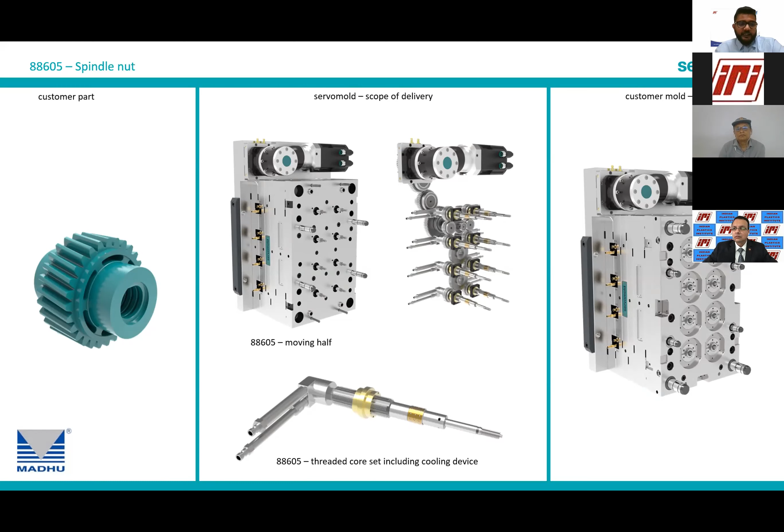Also, the specialty about these cylinders is that their piston rods are hardened and ground up to 64 HRC, and the cylinder housing is roller burnished. This ensures minimum downtime of the mold, which occurs due to cylinder failure.

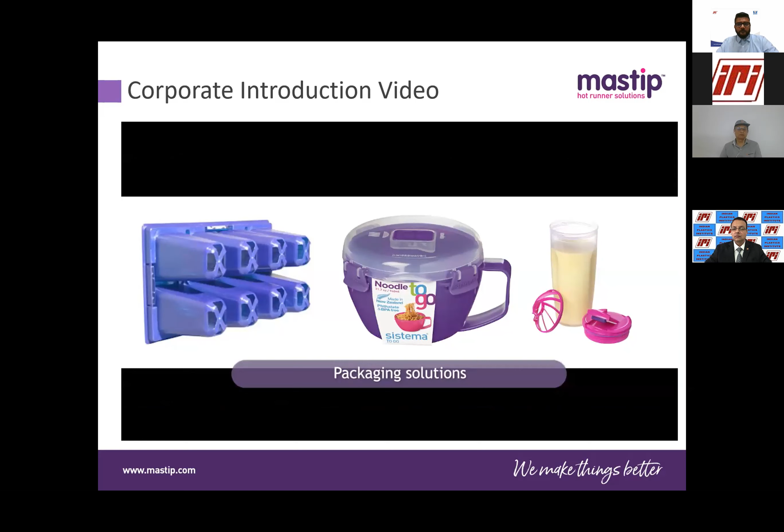Mastip is globally present all across the world with technical centers at New Zealand, China, Vietnam, USA, France, India, Portugal, and Spain, with manufacturing location at New Zealand.

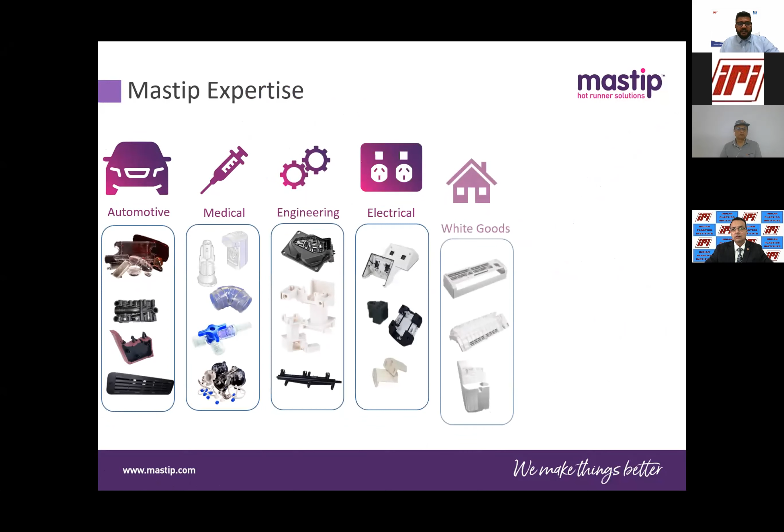Mastip has expertise across the entire industry segment, catering for automotive, medical, engineering, electrical, white goods, personal care, and packaging.

The market trends for automotive are delivering a light-weighted automotive car with increased high performance and reinforced engineering resin. Agile production, continuously developed with JIT manufacturing process. Going premium with increased cosmetic standard for interior parts. All this is addressed by Mastip by providing robust hot runner solutions to process engineering resins such as heat sensitive and corrosive abrasive resin, to ensure quick startup, flawless production, and meeting the high standard of aesthetic requirement of the part.

The key performance factors of automotive molds are balance of fill, improved gate cosmetics, abrasive and corrosive resistant mold, fast cycle times, and low cost of ownership. This is one of the most important factors.

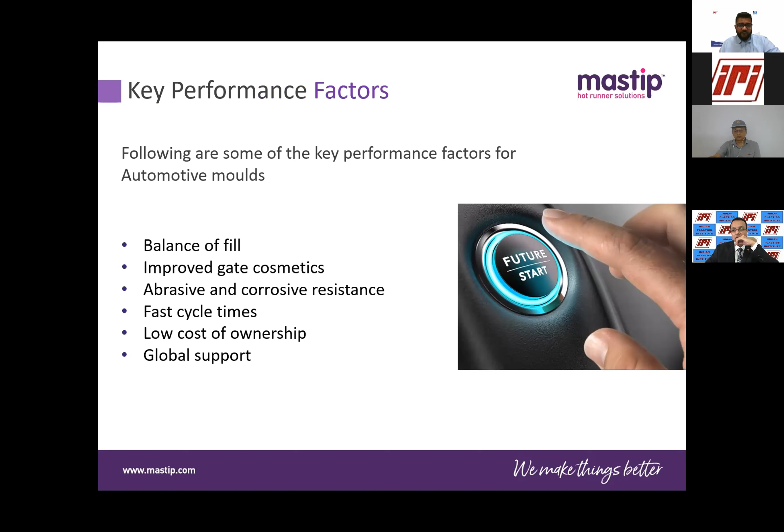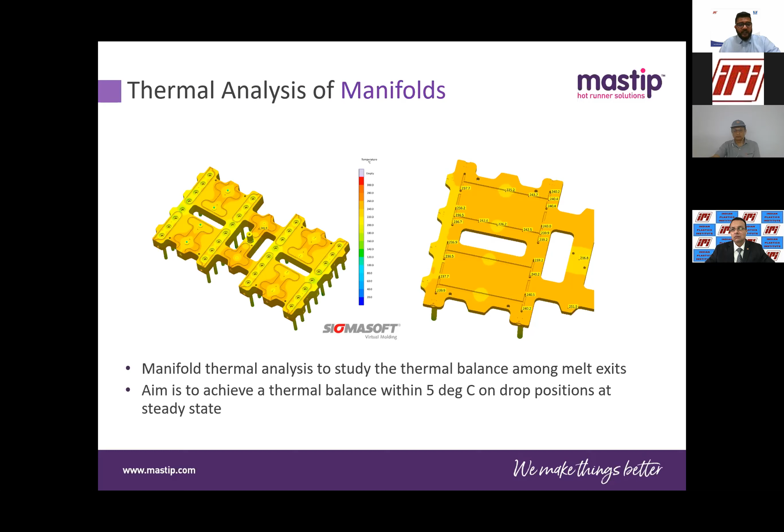At Mastip, the flow analysis provides customer molding insights at an early stage of design. It helps reduce the cost of change during the manufacturing process. For challenging applications, we use high-end thermal analysis software like SigmaSoft. Thermal balance within 5 degrees Celsius at steady state ensures a better balance of plastic as the material flows throughout the mold.

At Mastip, the melt channel sizes are optimized by studying the acceptable pressure drop and minimum melt residence for color change applications. Shrink fit deviation plugs eliminate dead spots at the melt exit, thereby improving color changes. Mastip uses clip-on design tip insulators for ease of maintenance. Our system components guarantee 5 million plus shot cycles with filled resins.

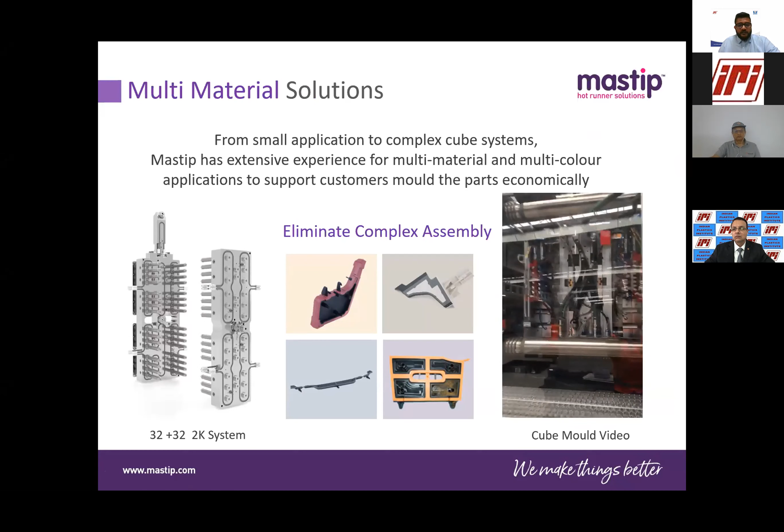As the market demands have increased in automotive applications for multi-material parts, Mastip already has extensive experience in multi-material, multicolor applications to support customers' molds, producing better quality in an economical and cheaper way.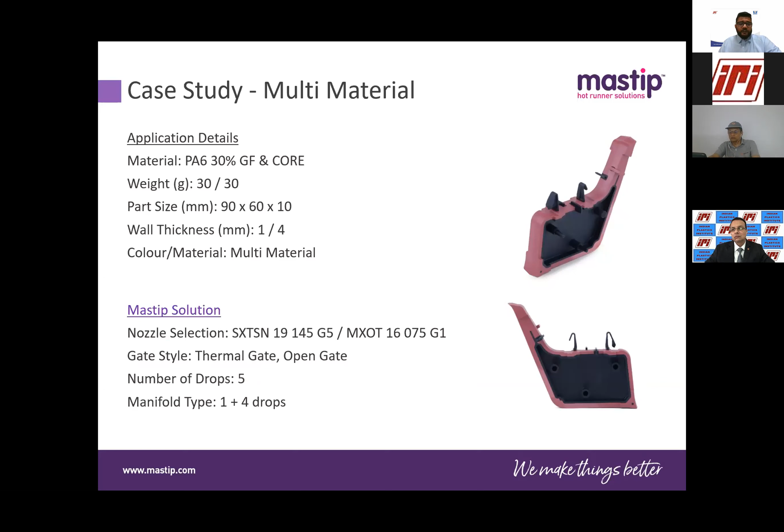Let's have a look at some snapshots of success stories. This is an LNL product which uses two multi-material shots: first is polyamide 30% glass fill overmolded with a special material core. These are structural parts used for shock absorption and damping.

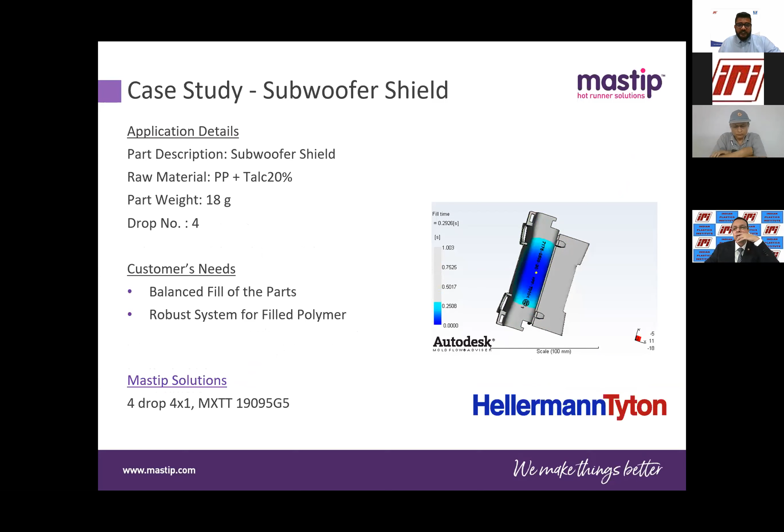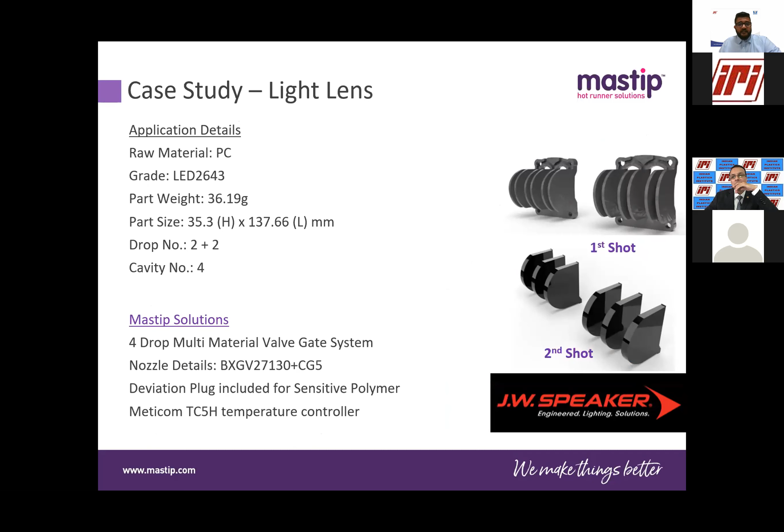We again have two shots, two multi-material PC light lens done for JW Speaker. Here we have an optical lens produced for BMW. This again was a two multi-material valve gate system.

The fuel system part uses polyamide plus 35% glass fill. This was again a challenging product done for Continental which used PPS plus 30% glass fill plus 30% talc fill.

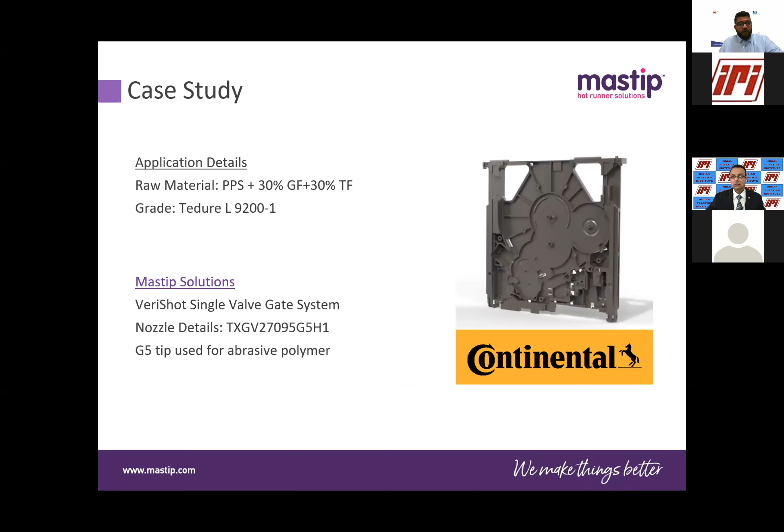There have been several other case studies done for longer parts like garnishes and door trims, but I have shown the interesting case studies which have been carried out using engineering plastic, which involves a lot of involvement at the manufacturing stage of the hot runner system.

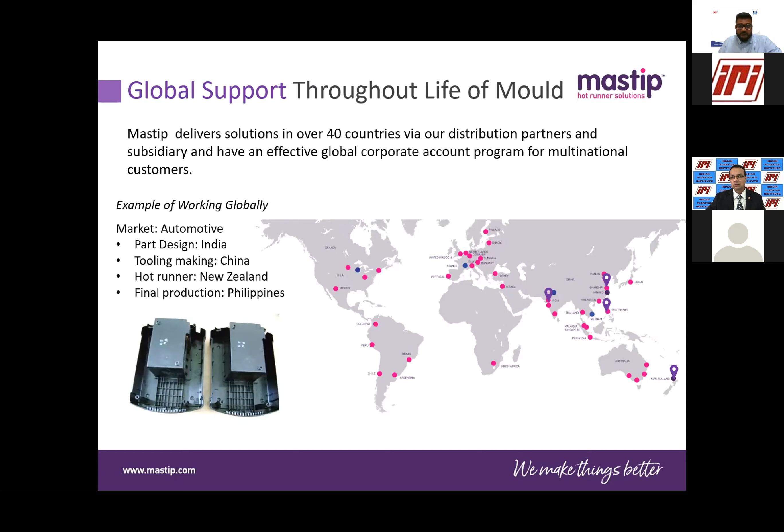All of these systems have been supplied to automotive industries as pre-wired, screw-in systems which are ready to drop in. And most importantly, as we all know, in automotive, sometimes the tools are designed in India, made in China, and run in some other part of the world, or maybe back in India. This is where Mastip delivers solutions in over 40 countries.